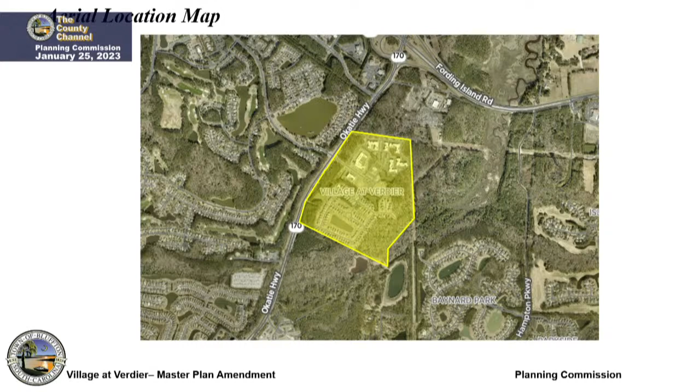This is a master plan amendment for Village at Verdier. Here's an aerial location of the Village at Verdier master plan, off of Okatie Highway just south of Fording Island Road. The road that enters it is Seagrass Station. Here's another shot of it. What's highlighted in yellow on the west side is the area where the amendments take place, which will be further explained in a moment.

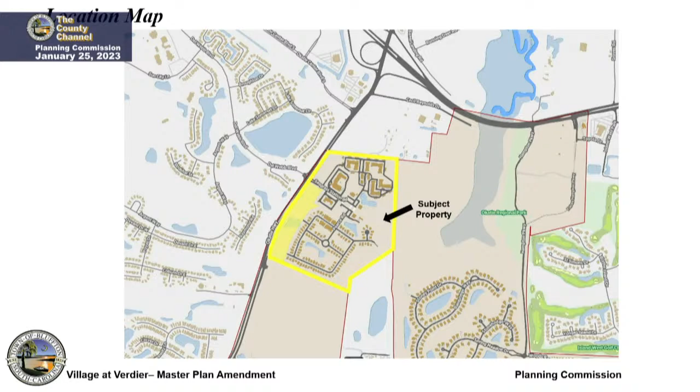The requested change is that the applicant Dan Keefer of Witmer Jones Keefer, with authorization of property owners Charlie and Brown LLC and Bright Holdings LLC, is requesting approval for an amendment to the currently approved master plan for Village at Verdier, located in the Village at Verdier PUD. More specifically, the amendment request includes: first, removal of a previously approved residential access point connection to South Carolina Highway 170, or Okatie Highway, between parcels Y and Z. I'll have a slide showing these closer in a minute.

The second request is removal of a previously approved road in parcel X. And then the third one was per town staff request.

The master plan has been further amended to reflect changes that have occurred on the ground during the development of Village at Verdier since the master plan was approved. We had a couple developments within the Village at Verdier that kind of varied a bit from the master plan. We didn't amend the master plan at that time, so this is really just playing catch up to what's developed on the ground for that third request.

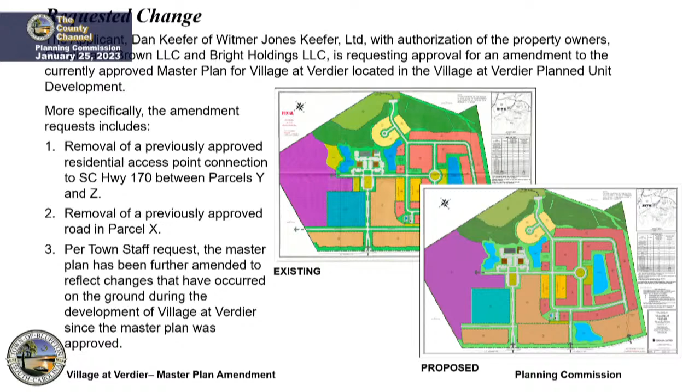This is the existing master plan. Sorry, hold on one second.

I'll be referring to this as parcel X, this is parcel Y, and this is parcel Z. Right now with the existing master plan, this is Okatie Highway, SC 170. We show a connection that runs between parcels Y and Z and into the residential development behind it. Also have a connection here and a parallel road running within parcel X.

The proposed master plan, what's being proposed is turning this not into a direct public access, but actually it will be a gated emergency only access at this point, and also the parallel road being removed here.

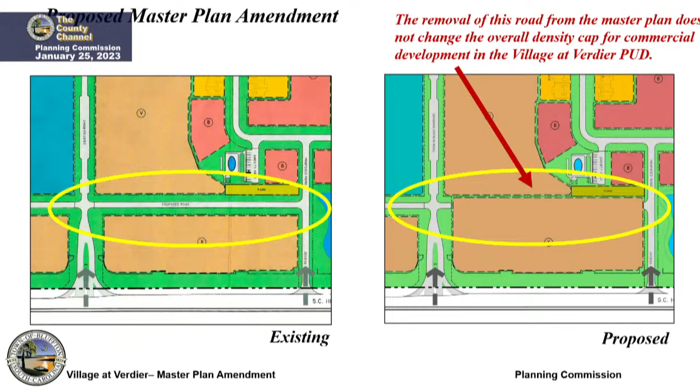So the left is the existing parallel road I just mentioned in parcel X, and to the right is what is proposed. Should note that the removal of this road from the master plan does not change the overall density cap for commercial development in the Village at Verdier PUD.

This is, on your left, existing, and it shows the connector road going back into the residential behind parcels Y and Z. And what's being proposed is a public access being replaced with a gated emergency access.

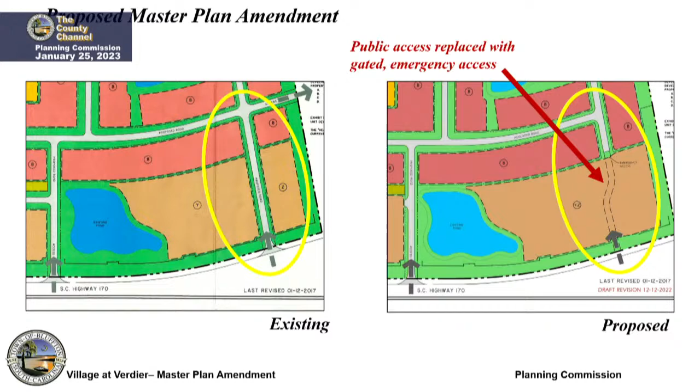Any questions for Dan before I open up to applicants? Would the applicant like to speak?

Thank you for adjusting the agenda for us. I'm Dan Keefer, Witmer Jones Keefer, and we have a couple other team members here that I can introduce as we go along. So we're really here tonight just to answer questions.

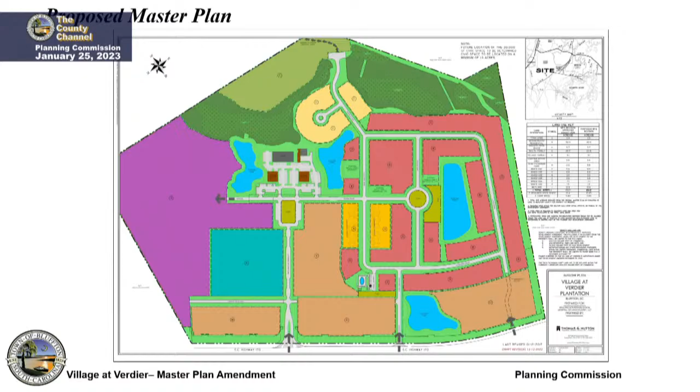Yeah, up near the clubhouse. I think they're just showing a diagram overlaid on top of what was there, saying they don't know what the future is going to be. So it may not be that particular exact location. There's still going to be some type of connectivity, but until someone develops that, they just don't want to be bound by a specific road. Is that correct? Correct, yes.

If it helps, we'll have them do a dotted future connectivity feature - it will provide connectivity, not necessarily a 50-foot wide roadway, but maybe connecting through a parking lot. We can easily have them update that before it goes to town council. I just don't want those access points to shift closer to the road either. Understandable. I'm sure there's different codes for how far away they need to be. Yes, absolutely. So, does anyone want to make a motion?

I'll make a motion that we approve the town staff's recommendation on this plan. Do I have a second? Second. Do I have any further discussion? All in favor? Aye. Okay, thank you. Enjoy the game. Thank you.

Okay, so now we're going to New Riverside Barn Park. Certificate of appropriateness, a request by Court Atkins Architects on behalf of the town of Bluffton for approval of a certificate of appropriateness highway corridor overlay. Good evening, Commissioners. As Chairwoman Denmark just indicated, this is a certificate of appropriateness for the Highway Corridor Overlay District. It is in association with a public project that was reviewed by the Development Review Committee just a few months ago, so the park area was part of that review.

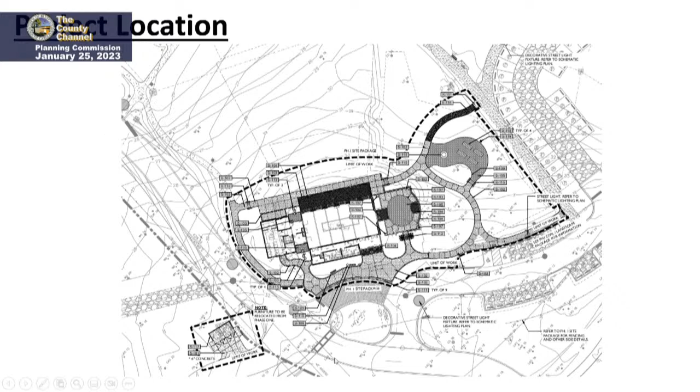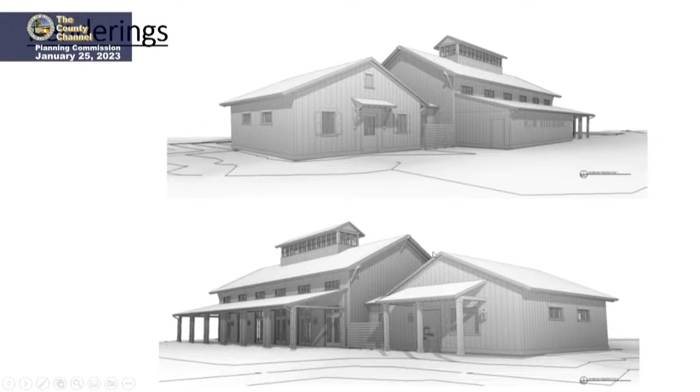They have provided some renderings for us, so the structure will be getting a facelift by having porches added to both sides, adding windows and doors along the sides to provide more light into the structure, as well as a bathroom and kitchen facility area being added so the space can be used for events. This is another viewpoint of it.

While they are modifying the structure, they're trying to keep some of the character the same. So it is a barn as you drive into town, and it'll still be a barn as you drive into town, just a little bit different looking.

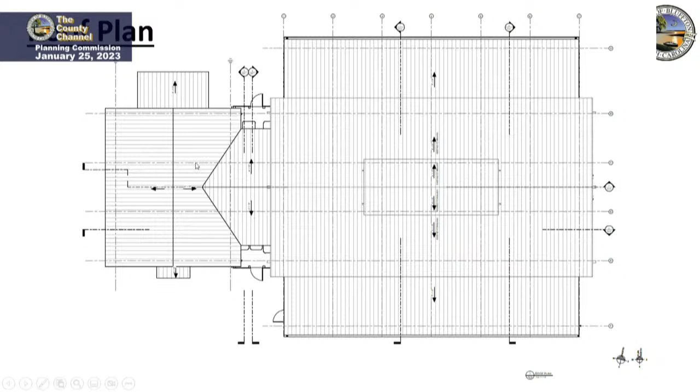And then these are the formal elevations. You kind of just saw these while looking at the renderings, but these are the up close and personal views. If you need to take a look at them closer, I am happy to flip back.

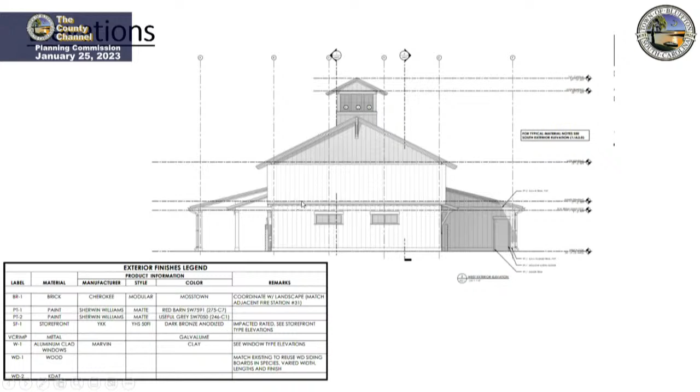These are the colors that are going to be used, with indicators on the elevations. Those were all included in your packets. I have an actual color board on one of the pages, but it just lists out the materials and not the specific locations. So as you can see here, columns, shutters, louvers, windows, it explains it, but it's labeled more specifically on each of the elevations.

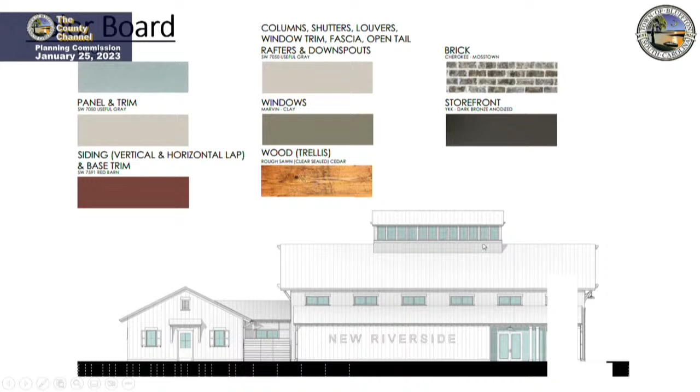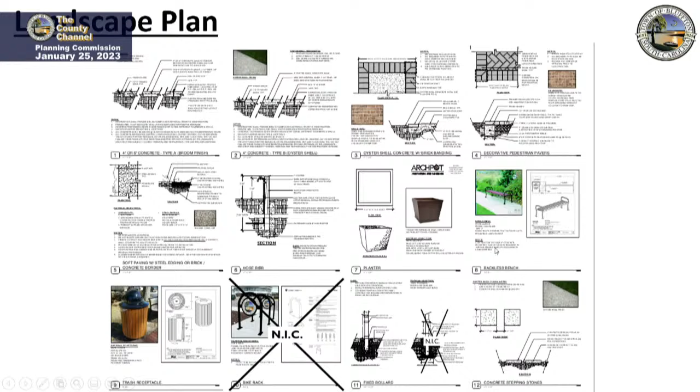Again, I am flying through this. I am happy to go back to any slide, but you all do have this in your packet, so hopefully we have been able to take a look at that.

Here's the landscape plan. I did discuss this with town staff. A few of the things commissioners brought up yesterday were that the benches, planters, and trash cans have a little bit of a conflict between the traditional and contemporary style. They said they'd be happy to take another look at it. That doesn't mean the choices are necessarily going to change, but they'll take a look to make sure they're all congruent.

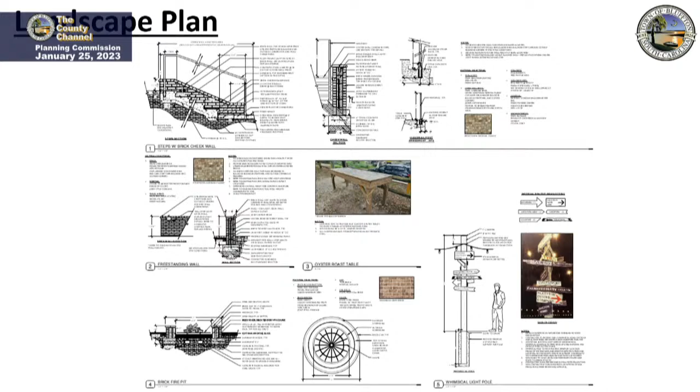As well as the gutters, it sounds like have already been something they flagged themselves, so thank you guys for pointing that out. They're going to take a look at that, and then the finished colors of the lights, I drew attention to those as well. They'll take a look as they get further toward the point where they install lights and things like that. So those items have been looked at.

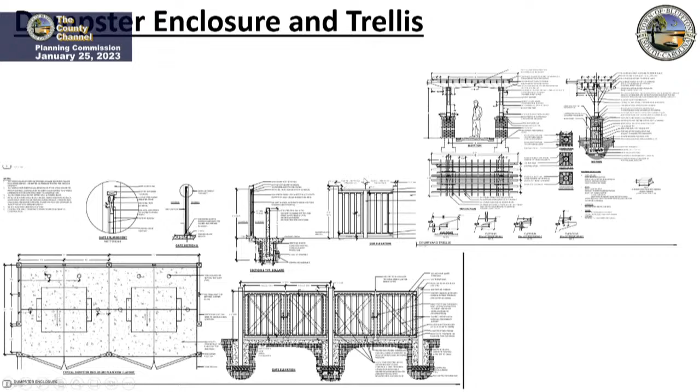This is the dumpster enclosure. It is just a wood paneled structure, very minimal, but it will blend right into the background there, so you won't even notice it, as well as the trellis structure.

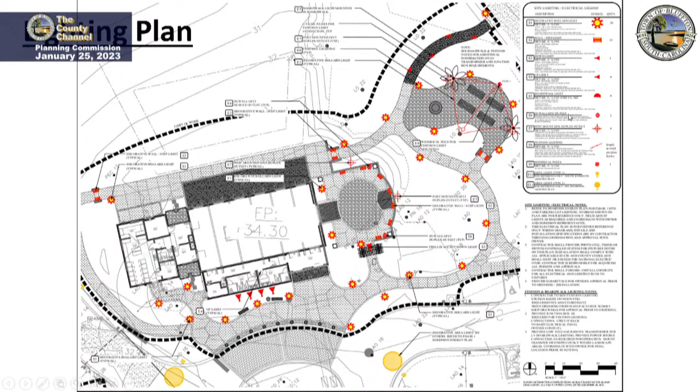This is the lighting plan for within that little area. And then the sheets that show which each of these symbols are in your packet as well. Those are the ones that have the little diagrams on them. Oh, these right here, so these are the pages I was indicating.

And this is one of those mixed metal things that we were talking about. So I've indicated that to them.

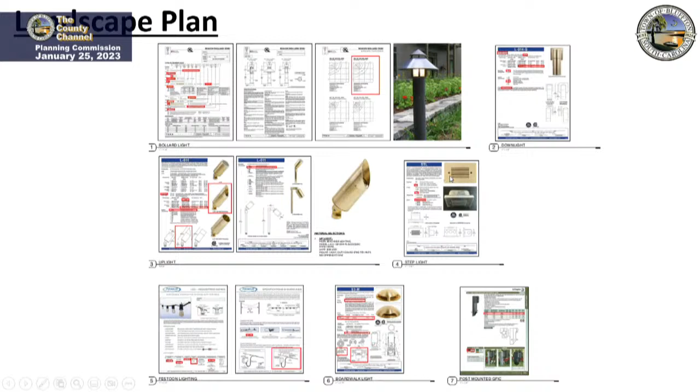Because this is located in the Jones Estate PUD, New Riverside PUD, it is not reviewed by the design criteria found in our Unified Development Ordinance. Instead, it is reviewed by the HCOD corridor criteria found in the New Riverside PUD, which happens to be the same as Jones Estate, in that 90-3 Development Zoning Standards Ordinance. So that's the BZDSO, which has been referenced throughout your packet.

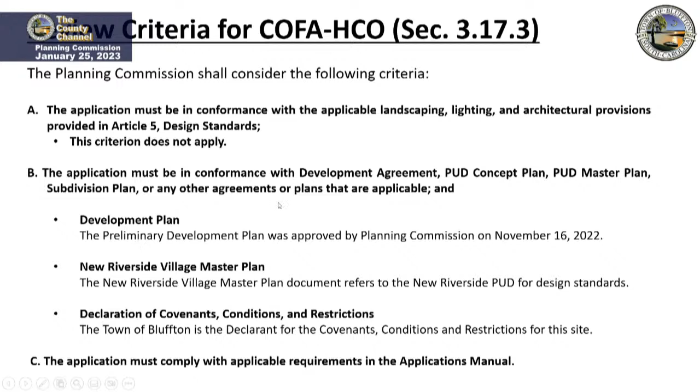In addition to that PUD, it is reviewed by the development plan. In this case, it's not actually a development plan, it is a public project, so it is in compliance with that, as well as the covenants and restrictions, which the town is the covenant and restriction declarant on.

It has been reviewed and is in compliance with all of those standards, as well as the applications manual, which the items in the packet reflect what we have seen before. The Planning Commission tonight has the authority to approve the application as submitted, approve with conditions, or deny the application as submitted.

Town staff found three items that need just a little bit of clarification from y'all - ones that do not meet the ordinance specifically. They are things we've seen before, specifically the roof slope. This one is a 3 and 12 on the 2 porch additions. The cupola, main structure, as well as the kitchen bathroom addition do meet that 4 and 12.

It is the 2 shed porches being added onto the sides which are not meeting that 4 and 12 - they're meeting a 3 and 12. And then the LED lights, that's something we've seen several times in the past. This code didn't take into consideration LED lights because they weren't commonly used at the time it was written.

The last one is the determination on the appropriateness of the illumination levels, which exceed the maximum for decorative and landscape by 0.6 foot candles at the maximum, which is permitted to be 5.0. It does not exceed that for a commercial parking area, walkway, or streets. So because this is an event space, it kind of falls in a gray area and one of them has to be applied. The decorative landscaping is the one closest to what it is, but it does have a bit more of a dense use than that. So it's something to take into consideration as you review this application.

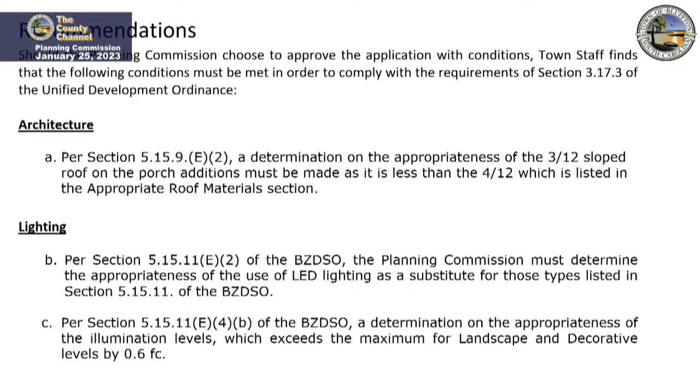So I just want to make sure it's clear for the public. Not to beat a dead horse, but I'm doing it anyway. With that, to do the 4:12 on this project, and I know you said you played with it, so I'm assuming that meant you shortened up the porch in order to still have the height above that first level and not encroach on the transoms. How wide was the porch then at that point? We looked at all of it, and we started on the front side where the restrooms are, got our restrooms to the minimum, the hallway circulation for the program, and that's kind of where the depth went.

And on the back side, if it gets too small, once it's down to 8 feet, it's not a functional porch. You really need 10 to 12 feet for a gathering porch. So we looked at all sorts of options on that, and the decision was to keep the transoms and lower the roof pitch in order to get natural light in. You need that light in the building. We looked at all the options and felt like this was the appropriate one to bring to you all to review.

Is there anything else? The signage on the side of the building, you're saying it's currently there and hasn't been painted off. Today I can go out there and see New Riverside on the side of the barn. Yeah, it's kind of a unique feature. Are you repainting it, or doing the letters in some other fashion? It just says how tall the letters are, it doesn't say they're existing. Are you changing how those letters are done on the side of the building?

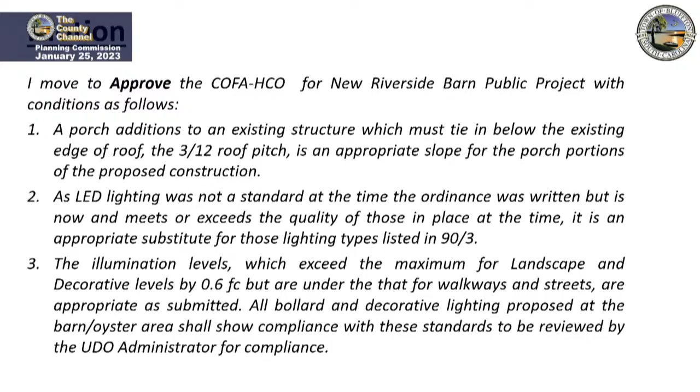No, we'll have some boards that are rotted out there that we're going to have to replace and refinish, so we're going to do our best. We're going to keep as much as we can because we're peeling it off, insulating the walls, putting the wood back on, adding rain plane and other things you need to waterproof a building, then putting that back on. We're basically replicating what's out there now, which is kind of a whitewash stencil on the plank boards.

Maybe he just needs to note it a little better on the plan. I was going to say, Katie, is there repainting so we know it's not being changed? Do they have to go back through the signage approval? We do not, if it's remaining the exact same. If it's a new one, then they'll come through at a later date, that's just fine. Just to clarify, that was approved by the Highway Corridor Review Board way back when it was built. So it's been there, I think. It looks cool, like it's been there for 60 years.

Okay, so if there's nothing else, anyone want to make a motion? I move that we accept the proposal as submitted with the staff recommendations. Second? Any further discussion? All in favor? Aye. Okay, thank you.

All right, Raider Drive Development Plan Application. A request by the applicant and property owner Jake Reed of University Investments for approval of a preliminary development plan. Dan's on this one.

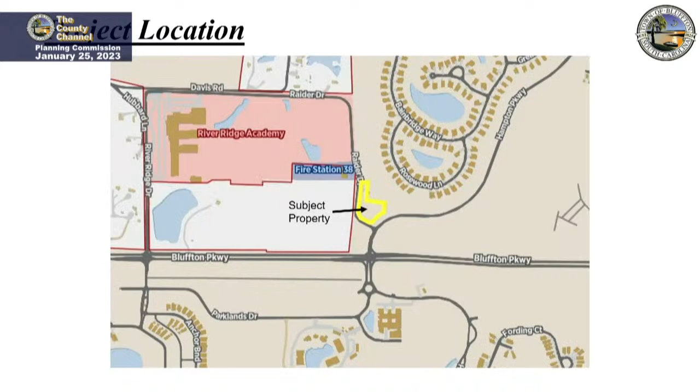The application is for a preliminary development plan located within the Buckwalter PUD, subject to the standards set forth in the Buckwalter PUD development agreement and concept plan and the parcel 10A and 10B master plan. The project consists of construction of a one-story, 9,500 square foot office building and associated access, parking, and utilities to serve the building. A total of 35 parking spaces are required, and the site plan provides 39 parking spaces. Staff comments on the preliminary development plan were reviewed at the November 2022 meeting of the Development Review Committee. On December 27, 2022, the applicant provided a response to comments and updated the site development plan.

Here is the site plan. This is Hampton Parkway, this is Raider Drive. The development would be accessed off of Raider Drive. The site plan shows 28 parking spaces, but an additional 11 parking spaces will be in gravel, identified just by parking stops and not with any striping. We have two access easements here that get to the substation in the back. Neither of these are going to be impacted.

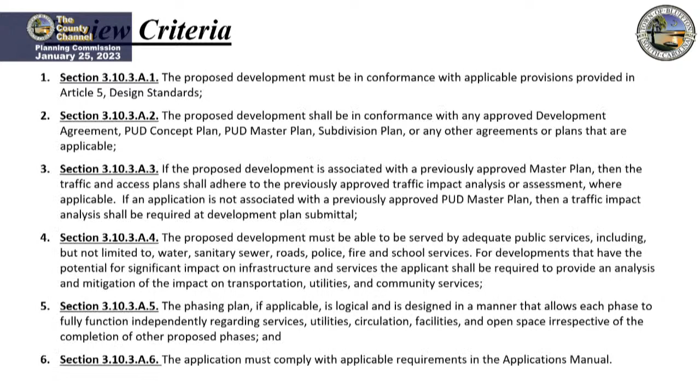The Planning Commission shall consider the criteria set forth in section 3.10.3A of the Unified Development Ordinance in assessing an application for a preliminary development plan. These are the criteria. Planning Commission actions are: approve the application as submitted by the applicant, approve the application with conditions, table the application, or deny the application as submitted by the applicant.

The staff recommendation: staff finds that the requirements of section 3.10.3A of the UDO have been met and recommends the Planning Commission approve the application with the following condition. One, outdoor storage within the utility easement underneath high voltage transmission lines shall be limited to non-combustible material. Storage of hazardous materials, including but not limited to flammable and combustible liquids, is prohibited. That's from the South Carolina Fire Code, section 316.6.2.

Could you show us on the map where that is that you're referencing? We have a power line easement running right across the front of this, so it includes the whole section between Raider Drive and the substation and continuing straight down. The applicant is here, and I can answer any questions if you have any.

Does anybody have any questions for Dan? Not the applicant—do they wish to speak?

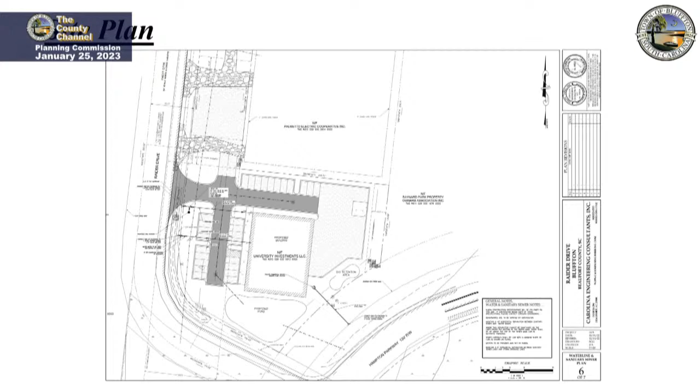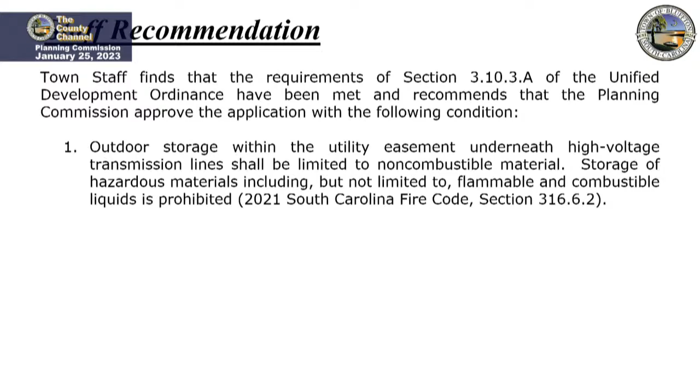Anybody else? A motion? I move that we accept the proposal for the Raider Drive office building preliminary plan as submitted with staff adjustments as stated, plus the consideration of the low-growing shrubs. Do I have a second? Second. Do I have any further discussion?

In consideration of adding screening along the property line that fronts Hampton Parkway. Okay, all in favor? Aye. Okay, we got it, thank you.